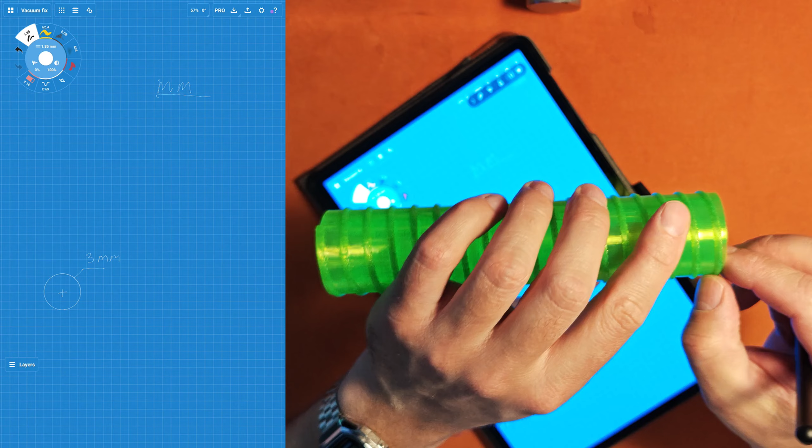As I said, I've already fixed this, but I'm going to show my approach how I did this, and we'll go from that point. We want to start off with a basic sketch of what basically is a spring inside. So this is a cross section, and I measured this 3 millimeters. So this is basically this right here. If we were to cut this, slice this open, this little rib is our 3 millimeter diameter.

And now what we would need to do is basically extrude it in this type of coil, right? So we'll have something that will look something like this, right? And off it goes. I apologize for the somewhat rough sketch, but the idea is to really just take rough measurements, right? So what we will have is then a tube inside that rib, and this should in the end look something like this.

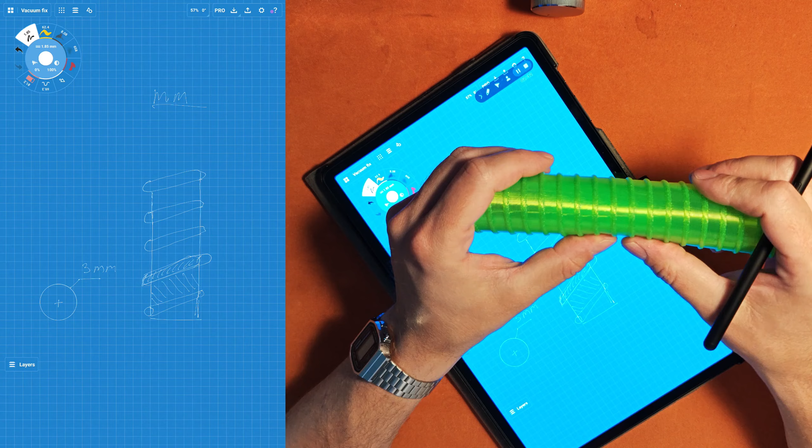What used to be a spring, we obviously cannot put a metal spring inside, so I am using my TPU flexible material to build up the tension in this section, while making this section as thin as possible for flexibility, right? So this here was one of our tests, and this was too thick. As you can tell, when I try to turn it, it collapses, and as a result, it blocks the air pathway.

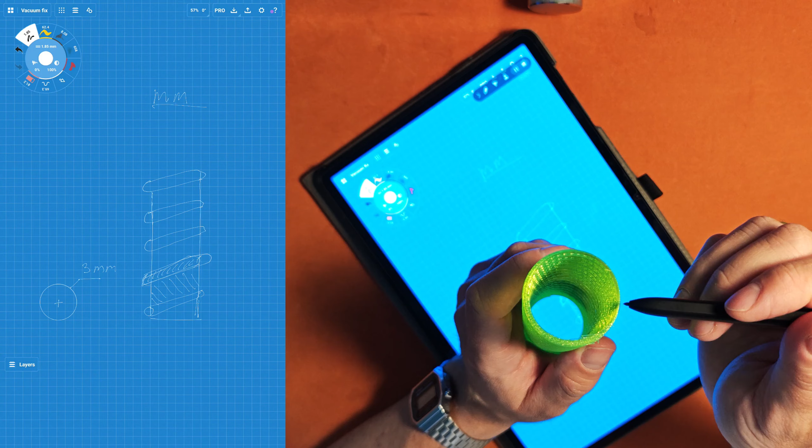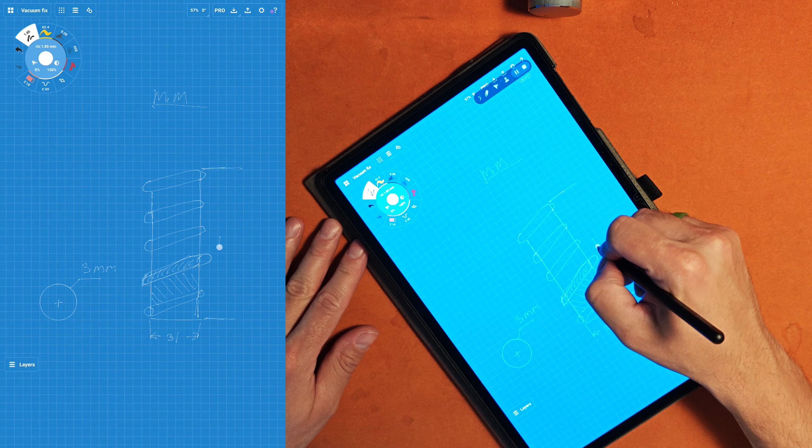This is why this is not the final version that's currently installed. This one was just too thick, the wall thickness, and this wall thickness is only 2 layers thick. So when I tested it, I realized this material is not flexible enough. So as a result, we know that this dimension here is 31, and I know that my tube, approximately, because I can always cut it short, I'd rather print it longer than needed, I need at least 180 millimeters long, right, to have enough. And as I said, I cut off some extra section.

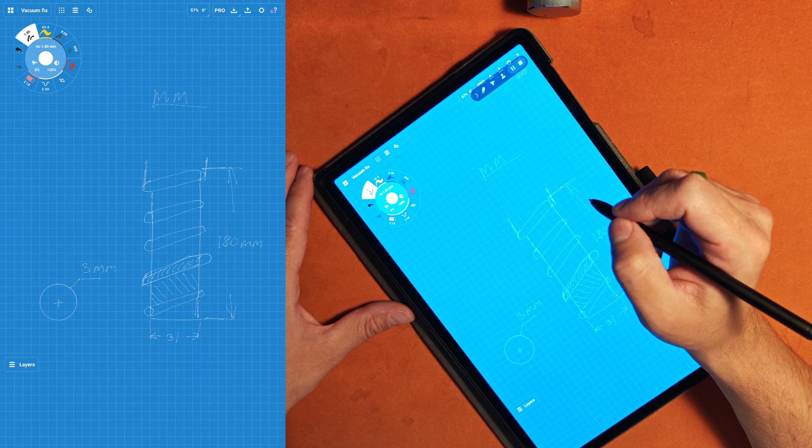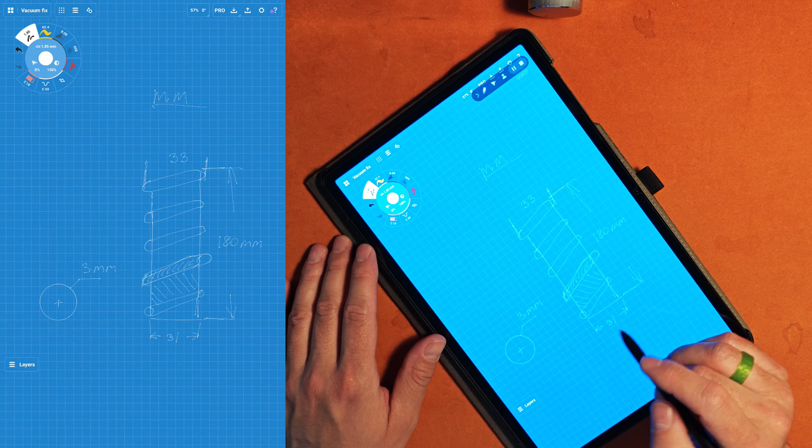At this point, I have only one dimension that I still need, and that is this here, right? So that is approximately 30. I believe it's about 32, 33. Again, this is relatively flexible, so I can work this inside the tube. Okay, so we have our sketch. We have our spring cross section. We have the cross section of the diameter and the length of the tube. Now we will jump over into FreeCAD.

Okay, so we start off with a sketch, and we begin with a cross-sectional area. Again, my approach, start your sketches at the origin. D for dimension, and my diameter is 3 millimeters. Now I have a little bit of an issue that I will run into. Because I put my coil at the origin, my center point of the tube will be somewhere over here or here. I do not like that approach.

What I will do instead, I will put my coil here, give it a dimension, and then, as we mentioned, our tube was 31, right, and roughly 33 for the outside dimension. So 33 divided by 2 will be 16.5 center to center, right?

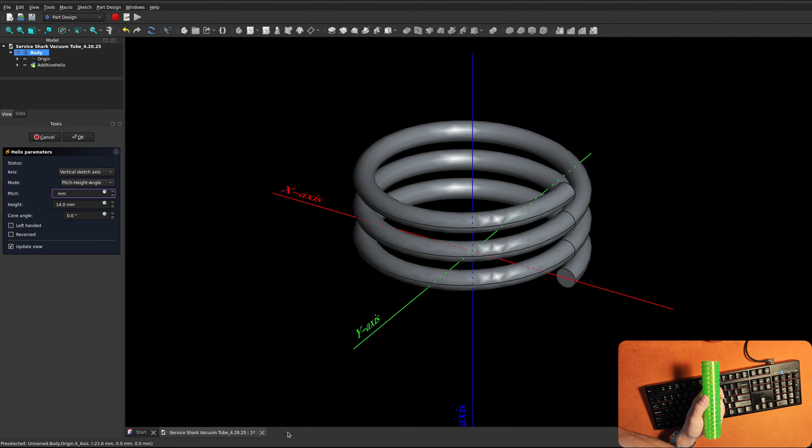First one being, we didn't measure it, but I know based on my test print, my previous testing that I've done, that my pitch is, and pitch, similar to how the screws and threads on the bolts work, is the distance from one high point to another high point, right? So if you think about this distance right here to this distance right here, that's our pitch. And in my case, the pitch was 10 millimeters.

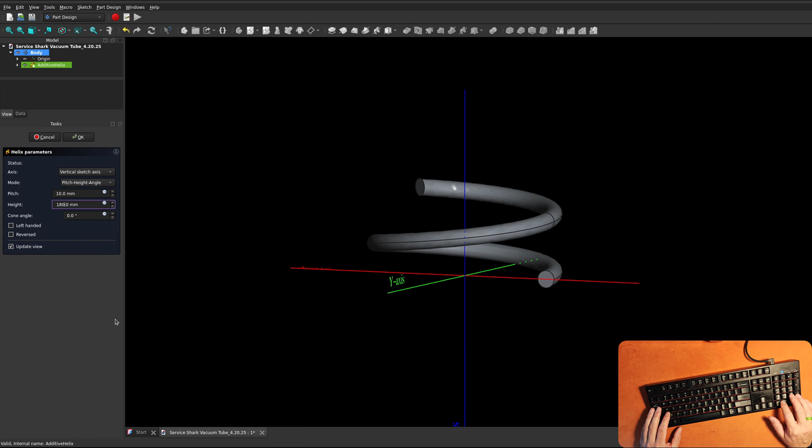Okay, so again, doesn't really look right, and that is because we want to change the height to 180. Okay, there we go. So this here represents our tube. So this is a tube without a shell, right? So it has no shell inside. So basically it's our spring, and that is it. Let me do a quick adjustment for visibility. Okay, just the colors I like.

Okay, so now how do we add the shell to this, right? We need a tube. As of right now, this tube is not leak proof. It's not gonna give us any vacuum. So we need to turn it into a tube. Create a sketch. Now we can throw a sketch on at the origin. And another one like this, right? So this will be our tube. We know that the diameter is roughly 31, so I will do 31.

And then I'll go half a millimeter, 0.5 millimeters in thickness on the radius, right? So my outer diameter is 31, which means that the diameter of the inner circle versus the outer circle needs to be 1 millimeter difference. So we'll do 30. And we will switch over to this view, right? So this here is now our layer.

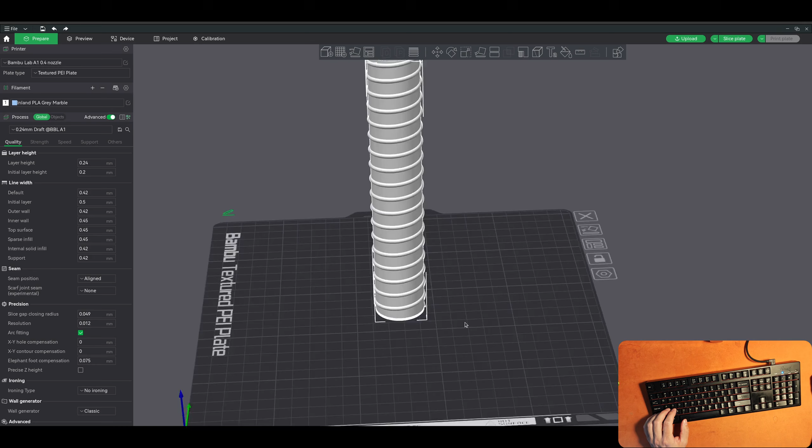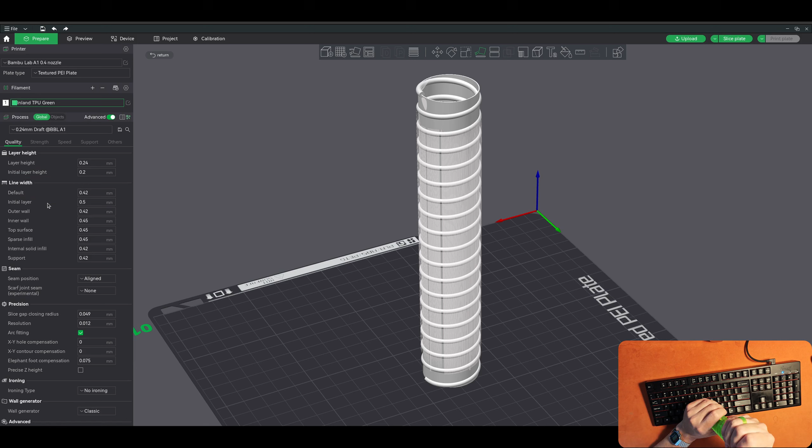Okay. We have our part. Looks great. Now, what I will do, I will flip this upside down. I trimmed this top section also because it will make it much easier to lay this tube flat onto a print bed. I have to print it vertically like this. Again, I am printing using a TPU material, my Inland TPU green. Great material, love it. Very nice and flexible, relatively easy to print.

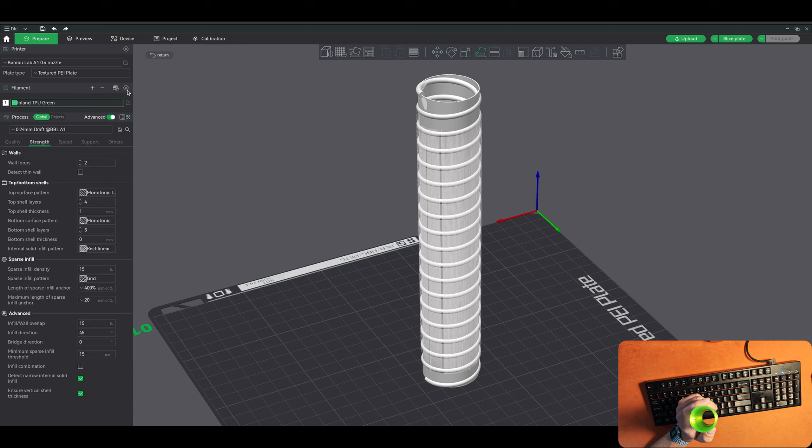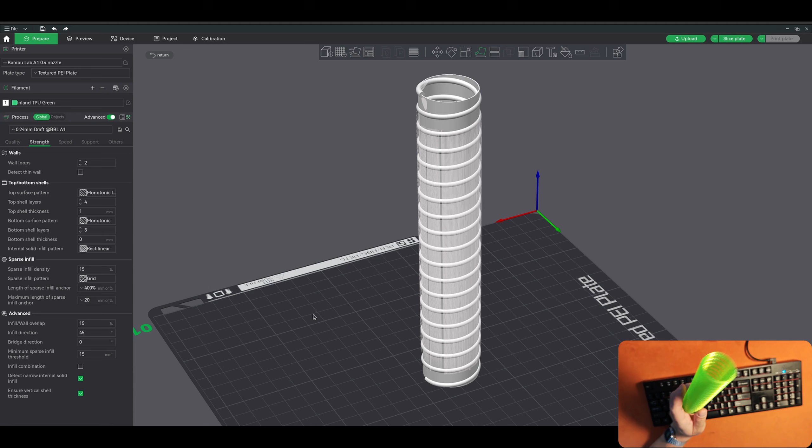I have this again calibrated. I ran a few tests, not on this particular part, but different shapes and sizes to really dial in the speed. What matters when you print is the speed. So if I go to the settings of my printer filament, I have a volumetric speed set for this material as well as the temperatures. And the Bambu Lab printer does the rest pretty well. So as you can see, it prints nice and clean. Very little oozing from this material, which I love.

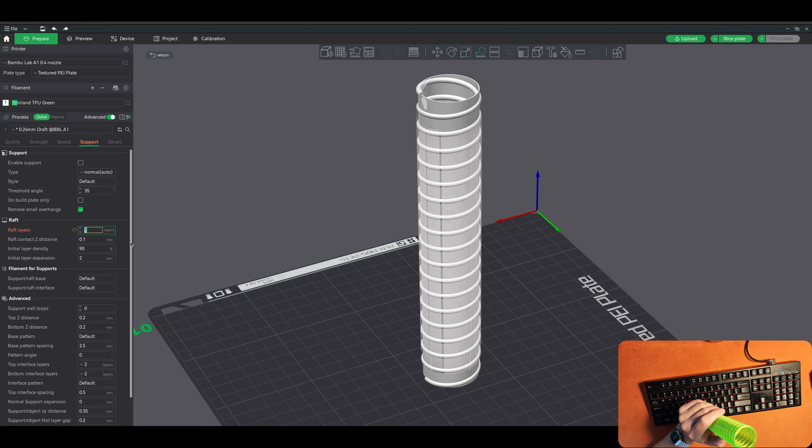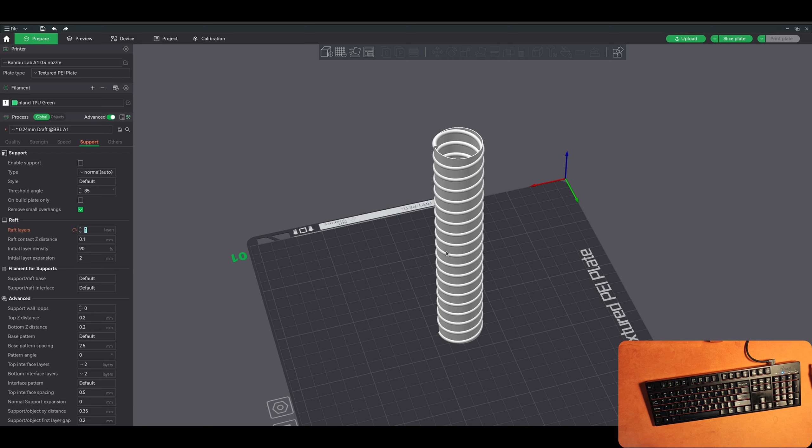This had no cleanup. The one part that I do want to add is a support, and specifically the raft. So I want to add one layer of raft material. What that does, it will add a little bit more footprint to our print, because this contact surface is extremely small. So this part will print for a few hours, and I don't want it to get to the final layers of printing and tip over, because that will ruin your whole print. You have to restart again, and it will typically happen almost at the end of the print.

So if I slice this, it adds this little raft, which just creates extra contact surface. This is extremely easy to come off once the print is done, but again, it will save you, because the printer moves so quick when it prints. This is what they call a bed slinger. So the bed moves with the part on it, and when it moves fast enough, it can actually tip the part over, and then you have to start over. It will take us 2.5, almost 3 hours to print.

So we will save this and send this over to our printer. We will come back. Well, we already know what the part looks like. I will show a little bit of 3D printing footage to show the real-time speed at which it prints. I hope this video helps give you some ideas how you can utilize 3D printing and CAD modeling to create your own things, fix your own things.